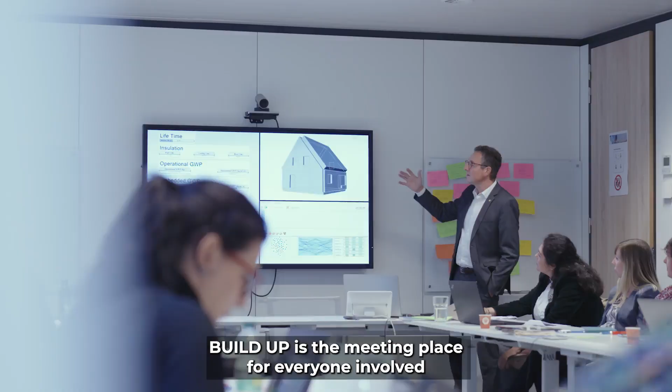Welcome to Build Up, the European Commission's portal for energy efficiency and renewable energy in buildings. Directly stemming from the Energy Performance of Buildings Directive, Build Up is the meeting place for everyone involved in making the European building and construction sector more energy efficient.

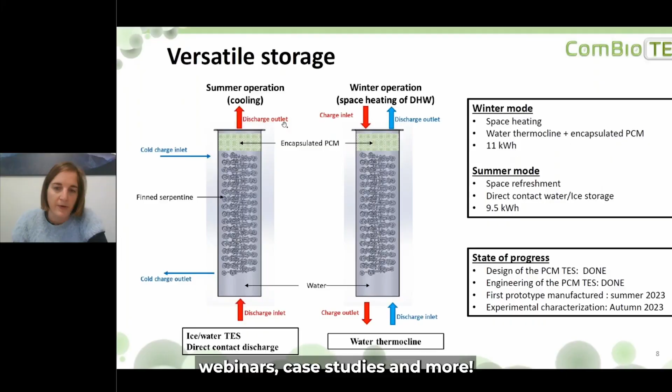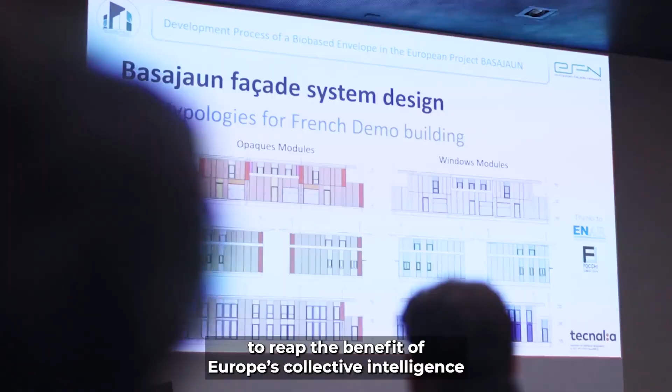Every month we focus on a topic that is key to making Europe's buildings as energy efficient as possible. Exploring that, you can find the latest content such as expert talks, webinars, case studies and more. From architects and engineers to academics and policy makers, we've got you covered. Build Up brings together thousands of registered members to reap the benefit of Europe's collective intelligence on all aspects of energy efficiency and renewable energy in buildings.

The Build Up portal benefits from the expertise of our ambassadors. Drawn from industry and academia, the ambassadors bridge the gap between EU and national level and help shape our editorial content.

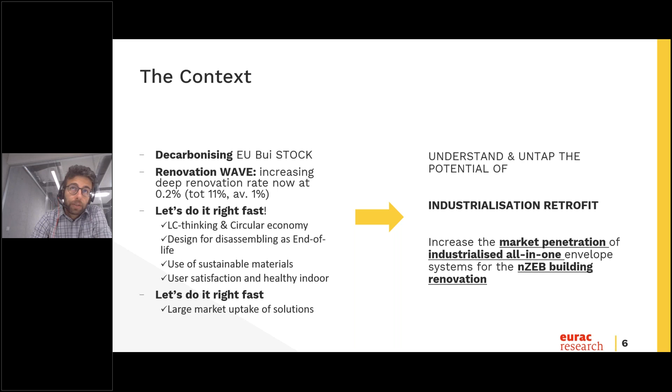There have been many initiatives at European level, and there are more and more requirements and, let's say, desiderata and wish lists. We have to do it in the proper way, and for doing this, the industrialized approach is one of the possible keys. So the INFINITE project exists to increase the market penetration of this industrialized approach through the realization of all-in-one envelope systems, reaching NZEB as an energy standard for the building.

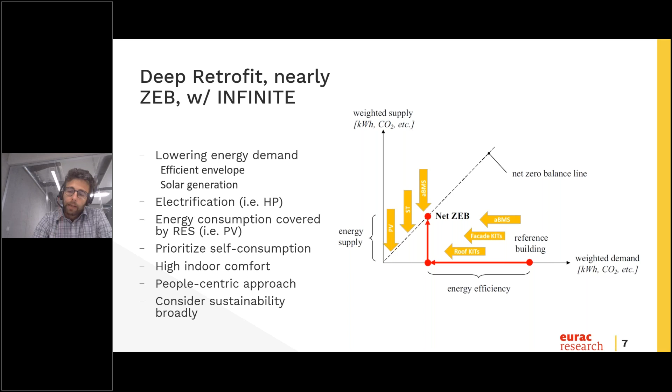What do we intend by this? We intend to lower the energy demand of the building via an efficient envelope, then lower the fossil fuel demand, electrify as much as possible the energy demand, and cover this consumption with solar systems, prioritizing self-consumption, keeping high indoor comfort. In INFINITE we have tried to work under the leitmotif of a people-centric approach, keeping sustainability as a central goal.

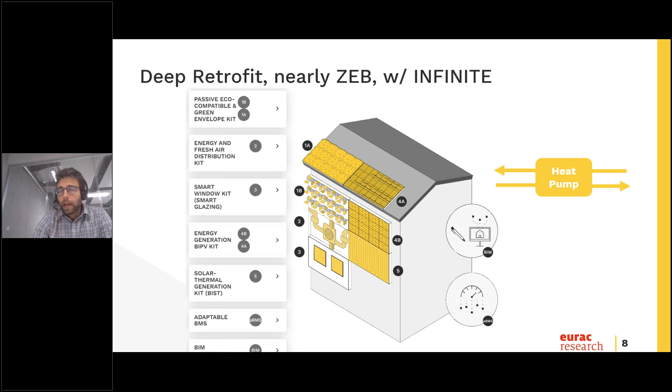These are the technologies we have developed and the solution overall. So there are envelope technologies, but also, as we will see today, solutions like the BIM Platform and a series of plugins and an adaptive building management system.

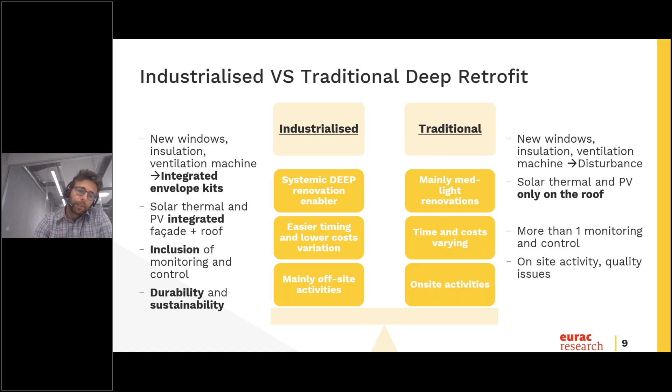So why industrialized approach? I think for years we have been talking in research, but also in company innovation fields, about the advantages: being integrated, systemic, including monitoring and control, and trying to let the durability and sustainability advantages emerge as much as possible.

So in the, let's say, early phase of evaluating investment and evaluating potential, we have developed the BIM platform and a market potential map and an observatory. Then the BIM platform again with plugins and all the prefabricated solutions will serve as tools for the design phase, implementation and commissioning. And finally, during operation with the ABMS, you will be able to assure that what you have implemented will operate as expected.

So I give the floor to Martino Gubert to focus on an analysis on a virtual demo, and I leave you with this motto: let's renovate faster and better, also thanks to industrialized renovation. Martino. Thanks a lot, Stefano. Here we are. So I will take control of the presentation.

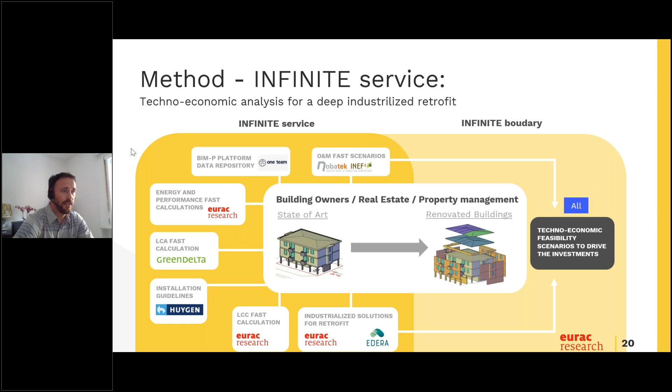So looking at the process of this analysis, the first step is owner engagement: describing the aim of the techno-economic analysis, understanding their needs and their target, and then evaluating their budget and the possible willingness to pay for extra benefit. The second step is data collection, so geometric data and energy data of the building, to collect what we can gather from the building owner.

And then the third step is to start modeling, so build a 3D model in Revit and then integrate it in the BIM platform. After that, thanks to the connection of the BIM platform with the several plugins, we can run several simulations. The first one is the energy and performance plugin. So we can evaluate the electric profile and the electric load of the state of the art of the building, and then subsequently the retrofit scenario solutions based on the different solutions we can collect.

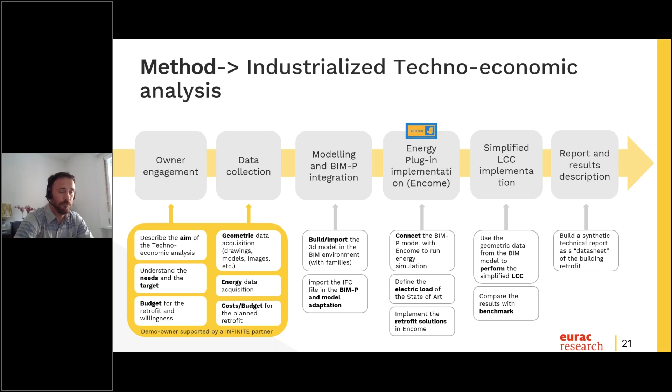And then in the fifth step, we can include several other plugins like the life cycle costing analysis, to perform a life cycle costing and then a benchmarking. And at the end, we can produce a short report to show the results to the investors.

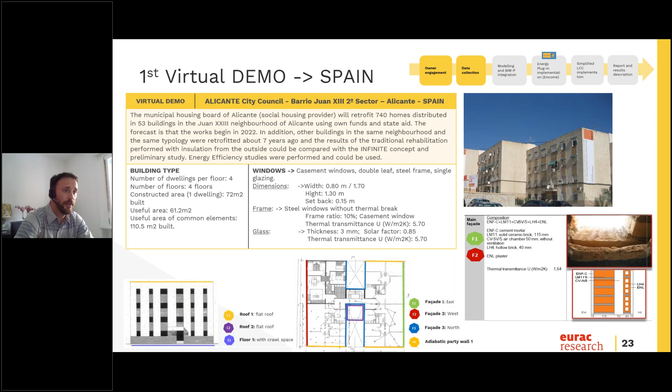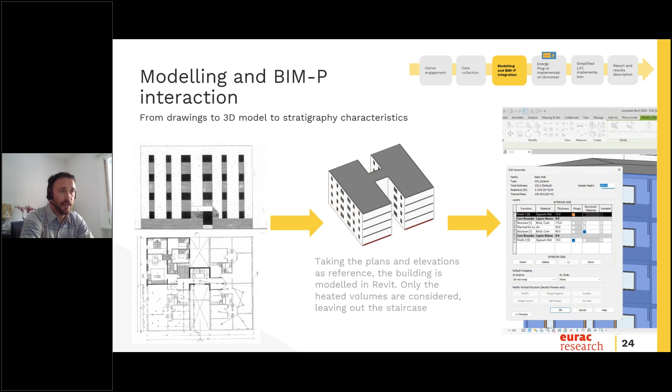So let's go directly to the practical application on a virtual demo in Spain. We collected as a first and second step the owner wish list and then the data of the buildings, thanks to our partner in Spain. As you can see here, the third step was to model it. In this case, we had just the 2D drawings, so we took a couple of hours to build up a simplified 3D model in Revit and then to connect all the characteristics of the buildings in their families.

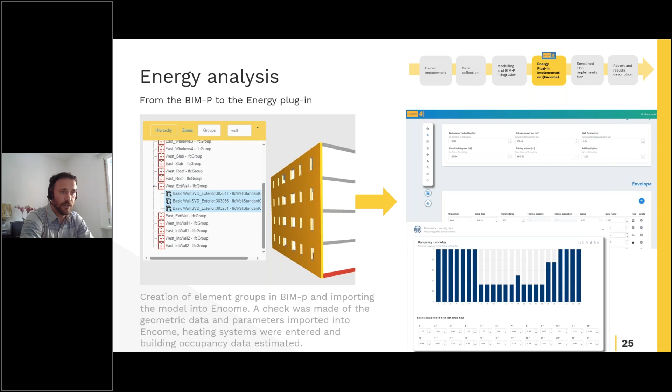And then we included this model into the BIM platform, and we grouped several pieces of information on the walls and all the systems of the buildings. And then we connected this BIM 3D model to the Encome plugin, adding also the occupancy level and other useful information to run the simulation. And thanks to that, we can arrive at energy results.

So in this case, it's the retrofit concept, but we can also have the state of the art, useful to have the comparison to see the improvement. As you can see on the right, we can add different kinds of measures. So in this case, a prefabricated facade, changing the windows and adding the cooling system.

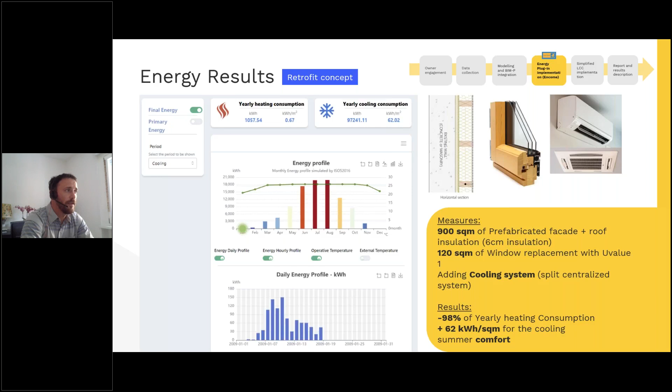After that, we ran several cost analyses thanks to a simplified tool. So not just the investment cost, but also the maintenance and operational cost. And then we are developing now the end of life evaluations.

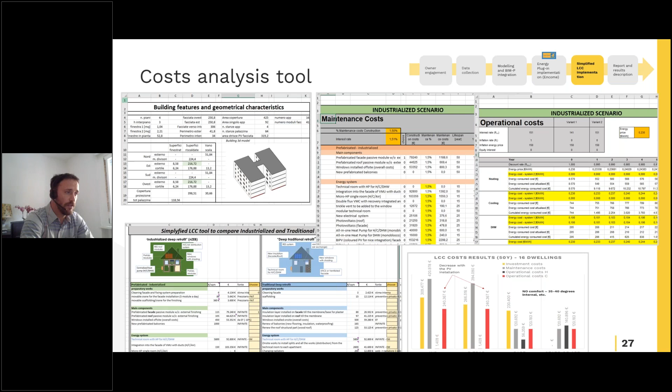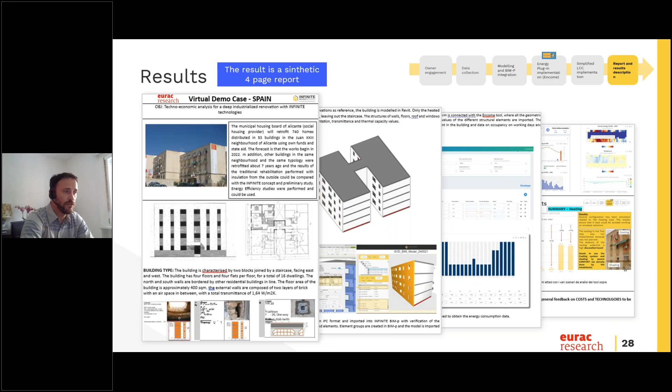Thanks to this analysis, we can compare the different scenarios, so the state of art, the deep traditional retrofit analysis with the industrialized one. So at the end, we just came up with a short 4-page report for the building owner or for the investors to let them know the main results of the analysis.

So I'm also finished with like a phrase: let's boost industrialized renovation together. We need to act now, no more excuse.

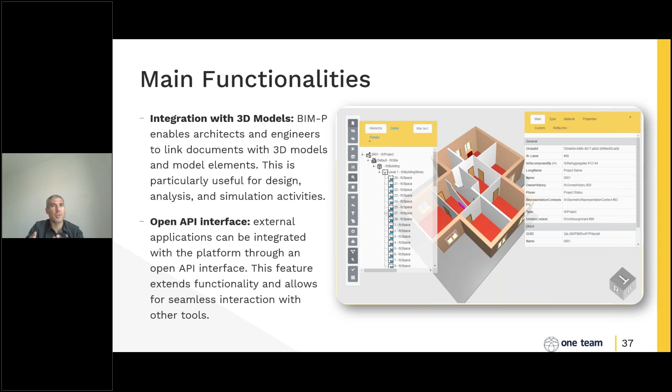It is also possible, obviously, to view the BIM models. There is a viewer for IFC BIM models, in the IFC standard, and also there is an open API interface that allows integrating external applications in the platform, like for example the plugins that we developed in the INFINITE project, but also other software and applications that exist, for example, in the commercial realm.

Another important feature of the platform is that you can work directly in your native model. For example, you can choose the BIM authoring tool you prefer. You just export and upload your IFC model one time, and then thanks to the BIM-P API and the engine that we have inside the platform, you can share the geometry and the data in real time with all the authoring tools, and this could be very easy for each design iteration.

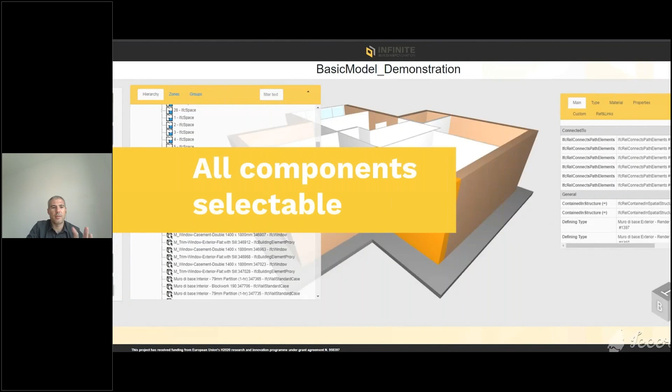An important thing is, for example, as you see in the video, that the BIM Viewer can support the visualization of the IFC. And this is important because you can see, for example, all the model elements. You can see the hierarchy, you can see the properties directly inside the BIM viewer in the web application.

And there is also the possibility, as I've said before, that the user can work directly with the preferred BIM authoring tool. And this is an example of Revit connected with the BIM-P, where the user interacts with the system. And also, at the end, all the BIM model can be enriched with documents that can be linked, referenced together with the BIM elements.

This is so important because it's very useful when you're working not only on design, doing the renovation, but you can manage the information of operation and maintenance, like you'll see in this video. Another important thing is that, for example, in the operation phase, you can select the elements that are inside your model, and you see all the properties that can be exchanged with the plugins.

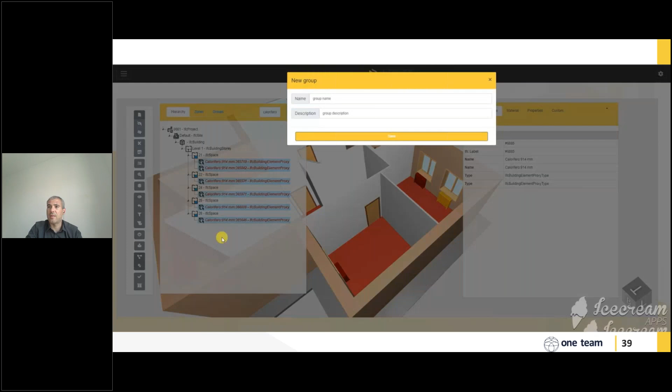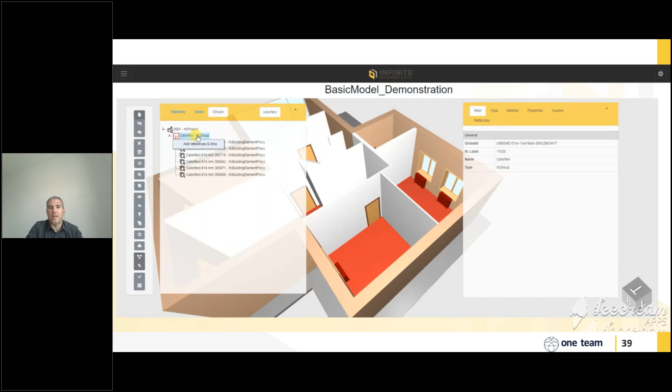And at the end, another important thing is that you can link documents directly with this BIM element. Then you can search, filter, and view all the operation things that are inside your model, that are inside your building. As you see there, you can categorize, you can group all the elements, and you can see directly here, for example, as a link, as a reference, all the documentation.

Documentation could be PDFs about, I don't know, data sheets or important information about the warranties and so on, but can be also other drawings, other BIM models that can be referenced together, maintaining all the history, all the tracked changes, and so on. And also you can share with other users, and you can give them permissions to access that.

Yeah, thank you. I leave the floor to my next colleague. That would be me, Friedrich Halstmerkmann. I'm trying to take over the control. I think I have it.

Great. So I'm going to present the LCA plugin, which we've also developed in the INFINITE project. Hopefully I can change the slides. Yes. So I'm going to start with user group definition.

We sat together in the beginning of the project and defined who this plugin would be for, because LCA is a little bit of a specialized topic, but also now getting increasingly important to a growing number of users. So we try to focus on the building design team, but also investor customers that could access the LCA, so the environmental lifecycle assessment data, and also the social lifecycle assessment data of the respective projects.

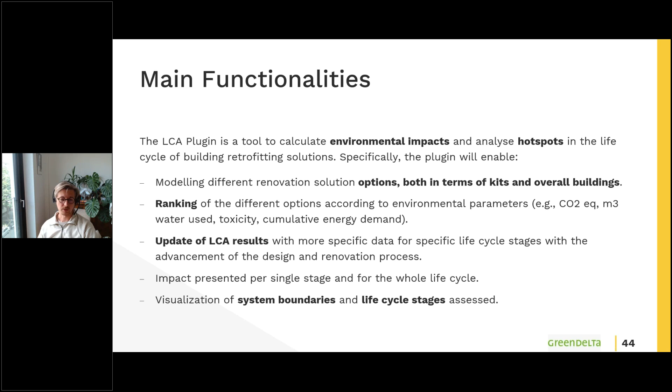You can also show the impact presented per single stage, but also for the whole life cycle. And we also wanted some extended visualization functionalities of the system boundaries and the life cycle stages. Okay, that being said, I will show a little demo video of the plugin.

So basically, it starts with a basic user management system that we have that also allows you to share elements, processes, etc. Then we have two main areas, buildings and kits. We have an INFINITE building library, INFINITE kit library, and then the user kit library where the user can specify their own kits and create them, delete them, etc.

If you create a new kit, you have to give it a name. There is some additional information on the manufacturer. You can give it a description. You have to give it a flow property.

So basically, what are we assessing? Is it 1 kilogram of something, or a cubic meter, or a square meter? Right, so now we've created a new kit, and we can add and modify different life cycle stages.

We do have, in this particular case, an EcoInvent database in the tool, but also other databases can be added. And you can also see here, when you look for respective processes, you can see the EcoInvent database processes that you can add. So now we're adding a transport process of this particular test cladding via lorry, and then we can search what we have in our background database if we don't have the data firsthand available.

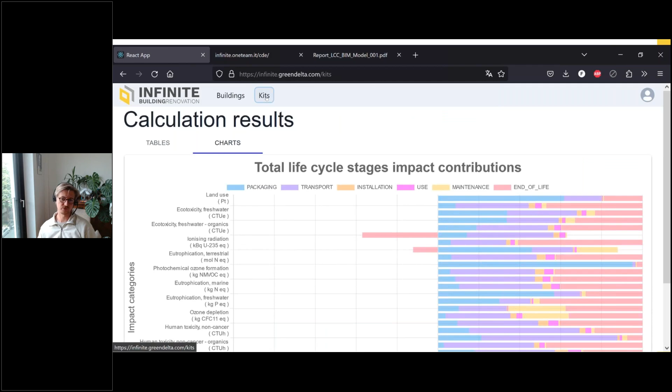And of course, one of the important functionalities was also a plugin into the BIM-P platform. So that is the last thing in this video we'll show. So we have to connect to BIM-P. We have to use our BIM-P username here and add some specification, then add the password, of course. We have to log into the BIM-P platform. Now we get a little notification.

Okay, so we're connected, and we have to specify some information to localize our results within the BIM-P platform. And now when we've selected everything, we can create the BIM-P resource, and then we can see it's added in BIM-P as a resource here, and we have a couple of different information we can see, so we can download this respective document, and we have all the impacts in that as a classification, there's description and tag, reference links, and the history.

Okay, so those are basically the main functionalities.

I will add, sorry, now the video starts again. No, thank you.

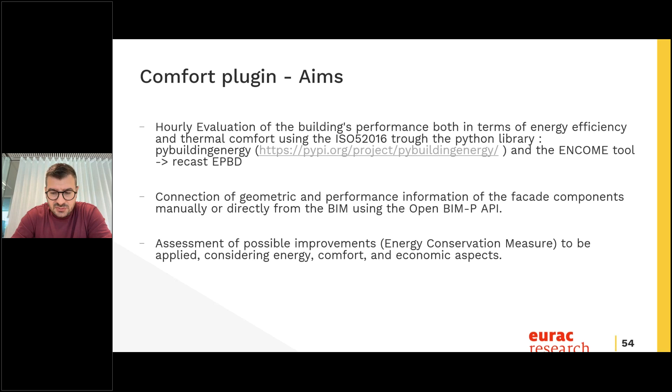And after, there is the part related to the simulation of the building and evaluation of the possible energy conservation measures, so taking into account also economic aspects, together with energy and comfort. In this simulation, we are going to use the virtual demo case in Spain, that has also been shown before by my colleagues.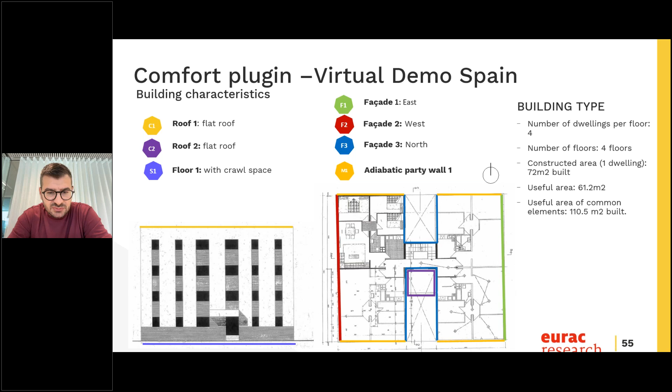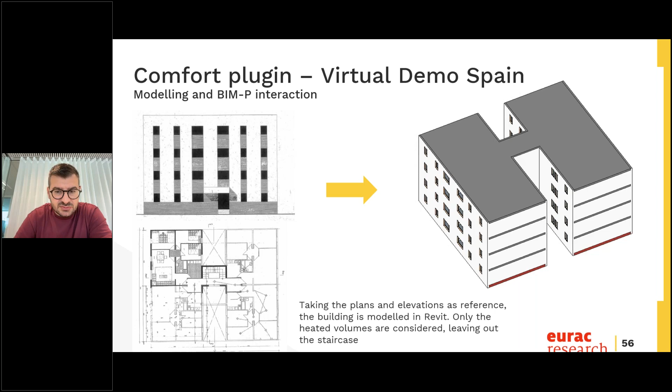So we have buildings that have been modeled using Revit, and in this case, we decided to model the overall building, and then in Revit we also defined different properties on the elements that characterize the facade, in a way that we can visualize this information also in the BIM-P platform.

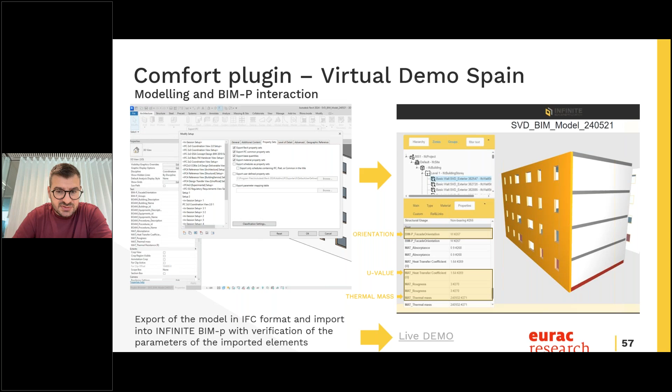So here there is the definition of the building, and after, the definition of all the properties, in particular thermal and energy properties, such as, for example, the orientation, the transmittance of the components, the thermal mass, the G value for the window. So all the information that characterizes the thermal properties of the facades. So now I'm just running this short video, in which I show you how it works.

We can start in the BIM platform, in which there are all the projects, and we can just select the one that is the Spain demo case. Here it's possible to select the components, and for each single component it's possible to visualize its different properties, such as the thermal properties, so the U value, the thickness of the wall, the thermal capacity, and all the information that we need for the simulation.

One of the important things is that you have to create a group. Each group has been created using the different orientation of the components. So all the components that are, for example, on the west side or east side, should be grouped together, because this is important for the simulation, knowing the different orientation of the windows of each group. Also, for the windows, we have the same information, so both for the opaque and the transparent components.

After this, we can go to our tool that is called ENCOME. This is the home page. In the home page, we can create new buildings, and in particular we have to provide where the building is located, selecting directly in the map or providing an address, and then provide other information, for example, the building name, the year, the typology, and the project the building refers to.

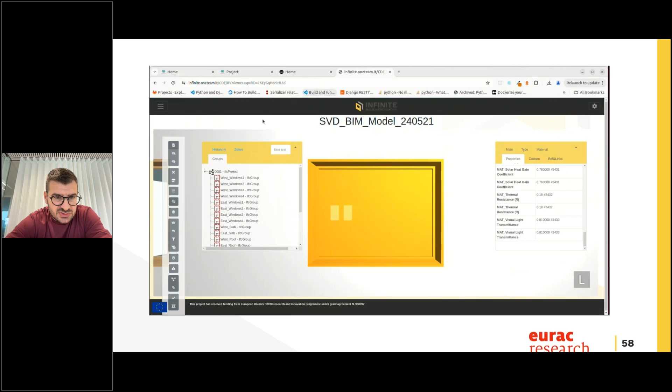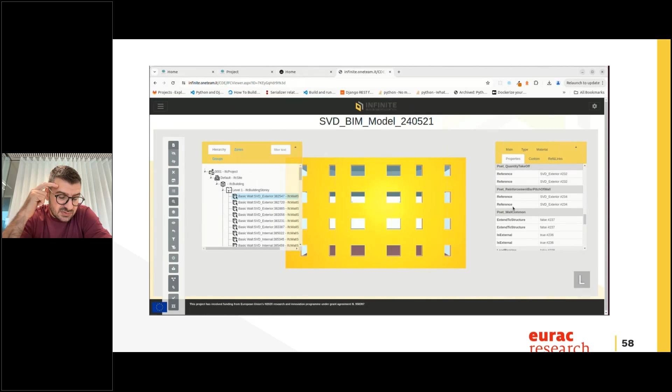And also, in those cases in which there is some information that we need but it is missing, the tool provides a check in red, in which you can provide manually the information that is not available directly from the IFC files. In this case, we are just visualizing some information that has been imported, to see if it is imported well, and after we are going to check and provide the missing data that we need, and also verify that all the data available for specific components are in the tool.

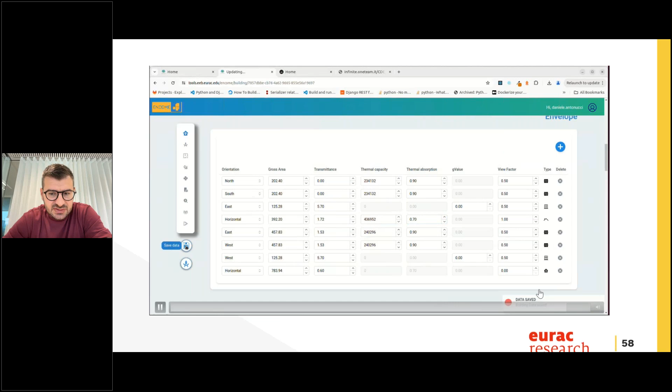So here, for example, there are some data not available for the roof. So we need to provide this information manually. After this, we can just save the data and run the simulation. Okay, here we can just run the simulation,

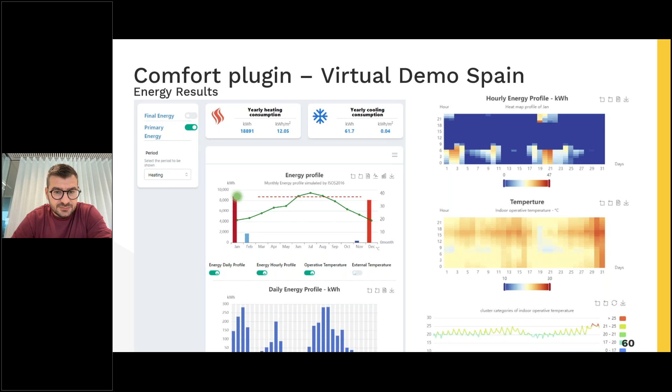and after we have the results, it's possible to visualize all the energy profiles, energy consumption of the buildings, the temperature profile inside the buildings, and other indicators that can visualize the comfort inside the buildings, for example, through different clusters based on adaptive comfort. So yeah, this is our motto: simulate, innovate, and elevate. Based on this, you can improve the performance of your building through energy conservation measures.

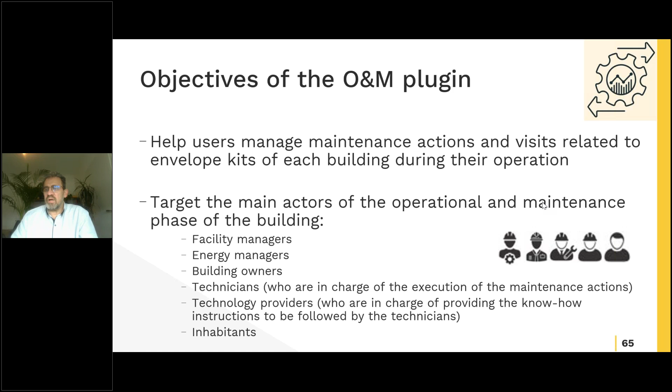Today, I'm going to show you the operation and maintenance plugin developed as part of the INFINITE project. This plugin is integrated with the BIM platform that David presented before. This tool is designed to support the various stakeholders involved in managing maintenance actions and visits related to the envelope kits of each building during their operation. It targets the main actors in the operation and maintenance phase of the building, such as facility managers, energy managers, building owners, and technicians responsible for executing maintenance actions. Additionally, it assists technology providers who supply the know-how instructions for technicians and, to a lesser extent, the inhabitants.

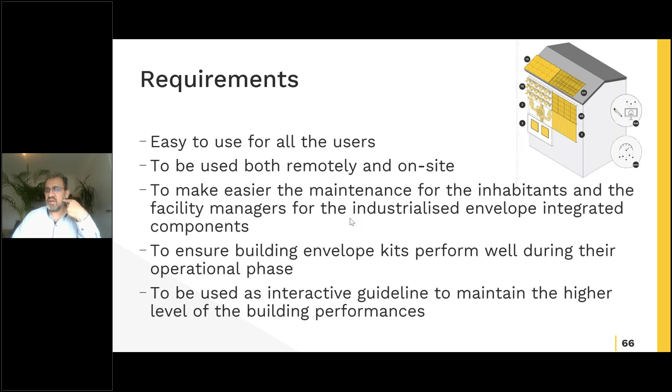So to ensure the tool's usability for all these stakeholders, our primary objective was to develop an easy, user-friendly tool for everyone involved in the project. For practical application by maintainers, the tool needs to be usable both remotely and on-site. This tool is designed to simplify maintenance for inhabitants and facility managers dealing with industrialized envelope integrated components. In the end, the operation and maintenance plugin aims to ensure that building envelope kits perform optimally during their operational phase, serving as an interactive guideline to maintain the highest level of building performance.

Thus, the development focused on creating a very simple and ergonomic interface following a predefined workflow that I will show you later. We paid special attention to the interoperability of the plugin to ensure seamless interaction with the One Team BIM platform, allowing for the exchange of documents and any other information that could be useful for maintenance. Consequently, application programming interfaces, APIs, have been developed and documented online. These APIs also enable interaction with the adaptable BEMS, which has been developed as part of the project. The adaptable BEMS can detect events based on specific malfunctions of the kit sensors, for instance, and it can automatically trigger maintenance actions through the plugin in response to these events.

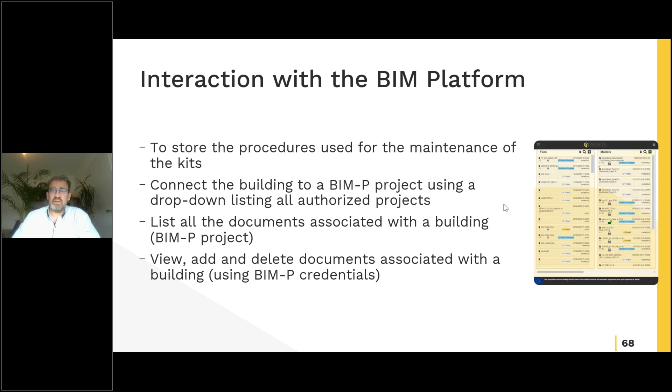The user can create or access maintenance actions attached to buildings, which can be sorted by date, type, priority, status, etc. This allows facility managers to quickly identify the most important actions to be completed in the coming days and weeks. Each maintenance action can be edited and updated.

The maintenance actions are also classified as either preventive or corrective. Preventive actions are defined in advance for each specific piece of equipment in the building, and corrective actions may be generated manually or automatically triggered by the adaptable BEMS based on equipment-level measurements.

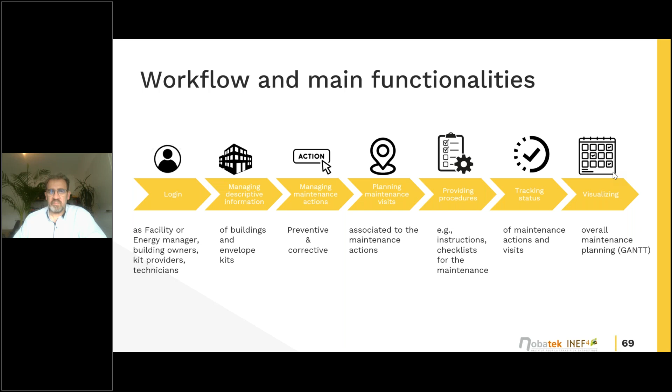The user can check the status of each maintenance visit and action. An overall maintenance planning is displayed in the building interface to support the organization efforts of facility managers. A quick demonstration of the tool through a short video highlights the main functionalities following this workflow. We start from the login page

and directly enter the landing page, which displays the main menu and provides an overview of the essential information available for facility managers. This includes a list of managed buildings and maintenance actions with their priorities. From this landing page, the end user can navigate to the pages dedicated to building management and maintenance action management.

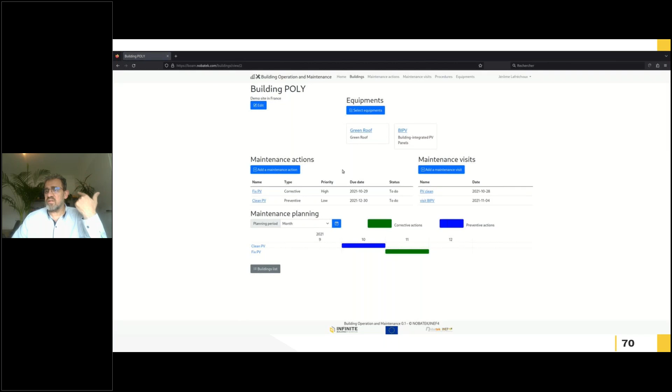For each building registered in the tool, the user can see the installed kits. For each kit, there are available procedures that list the actions to be taken along with their associated frequency. Returning to the building page, the user gets an overview of maintenance actions related to the specific building, the planned visit for each action, and an overall maintenance planning.

Maintenance actions can be filtered by type, preventive or corrective, as I said, priority and status. For each building, the user also has access to the list of attached documents stored in the BIM platform.

Okay, this is all for the O&M plugin presentation. If you want to test the tool, we are available to provide you access to the tool to get feedback on the usability of the plugin and perhaps identify ways of improvement. Thank you for your attention.

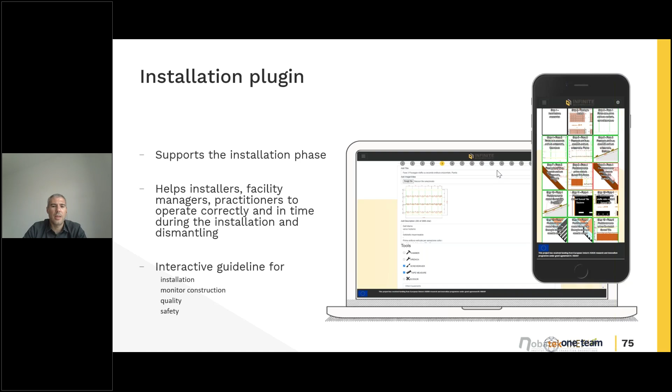It is a plugin that supports the installation phase and has different objectives, but the main one is to help installers, facility managers, and all the practitioners that operate in the phase of installation and dismantling of the building. The main goal was to provide a sort of interactive guideline to install, to monitor the construction, and to provide quality and safety information for the installers. And we created the installation plugin following a sort of procedure.

We see the installation plugin used in two different use cases by two different personas. The first is the technology provider. For example, you can imagine a photovoltaic panel producer or a supplier, as we saw in the example, to create a green facade of the building. So the first part is the installation plugin used by the technology provider, and then we have the same plugin used by the installer, the man in the field.

The first user basically creates the resources in the plugin and creates the installation wizard. That is an installation procedure, a step-by-step definition of the things that the installer has to do. Then, when the procedure is published, at the end there is the installer that uses this procedure to install the things physically.

And as you see in this video, this is the BIM-P, the BIM platform, hosting the first part of the installation plugin, where we create the resource, this resource as a procedure. Then we give a title, give a tag, give it a description, and publish the first part of the procedure. The procedure is very simple.

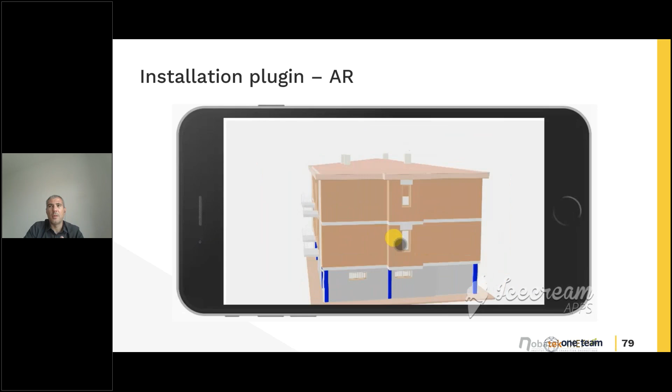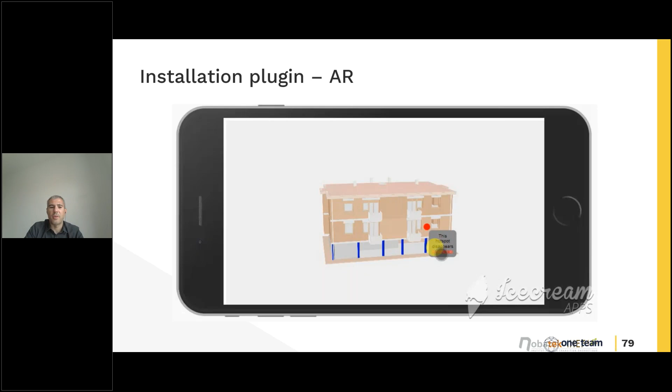Another important thing is that when you are in the field, maybe it could be more useful to see the installation, the items that you need to install, in augmented reality. And here is an example available on the smartphone where you can select, for example, the building where you are working, the items where you are working, and then on these items there could be some hotspots that can be connected with external links, with additional information like documentation, specification, and so on.

And all this information you can see directly on your smartphone, as a sort of overlay in the actual field where there is the building, where there is the item that you can install. And this is the installation plugin. Basically, it can be used by two different users. One is the technology provider that can put in data on how something can be installed as an interactive and digital manual and procedure, and then the final user that can install the things.

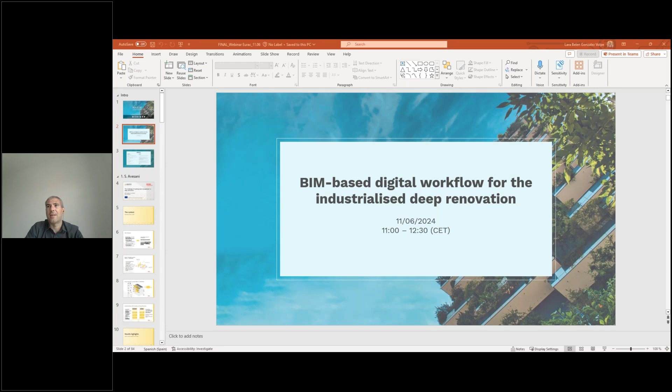So we have run through the presentations of the different features of this digital workflow that we have been developing in these 2 years of solution development within the INFINITE project. So now we are of course very happy to reply to questions. I will be the one picking up the questions and launching them to the speakers. So I invite all the speakers to turn on the camera, please, for this final part of the webinar.

So I'm reading in the chat and picking them up. I will try to follow more or less the same schedule we had for the presentation. I think one of the questions was for Martino. So in this virtual demo techno-economic analysis, what do you think is the real added value? What is basically the value proposition of the analysis that you presented, and which related key features?